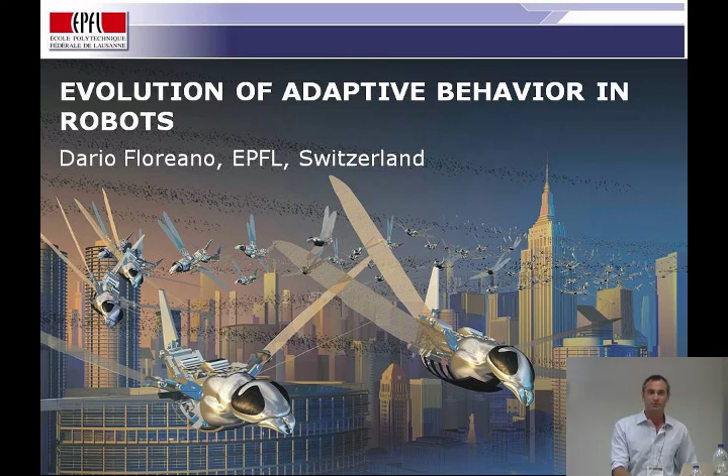Instead of focusing on one, two, or three specific examples of robots that may have evolved some sort of relatively complex cognitive functions, I decided to show you many cases of robots that we have been evolving in the lab. Some of these cases are more sophisticated than others.

It's a little bit up to you to see what we can do with this approach, how far we can go, and whether some of these robots may start to manifest some of the ingredients that we need, or that we think are necessary, for the evolution of consciousness.

My stand on this problem is that nothing makes sense except in the light of evolution, as it has already been said in the past.

My laboratory is very active in many aspects of robotics, including utilitarian aspects of robotics. So this is an artistic view of what we want to do. We focus quite a lot on biomimetic approaches, and we develop a lot of flying robots.

Although you will see very few flying robots in my presentation on evolutionary robotics today, because for technical reasons it's difficult to evolve them. I'm also interested in the evolutionary approach to the design of robots and control systems.

Inman Harvey made an excellent job this morning explaining the basic evolutionary cycle that we use in evolutionary robotics, and I want to repeat that.

I want to show you, however, an example of how you can apply that evolutionary loop to a very simple robot.

Imagine that you have a robot, a circular robot, and you want to evolve the capability of doing collision-free navigation. You start with a generation of random genomes corresponding to different control systems, and one of the main ingredients is that all the robots in the initial population have diverse genotypes and diverse behaviors.

So you see here two robots of the first generation. The first one was rotating on the spot. The second one rotates on the spot, then goes towards an obstacle.

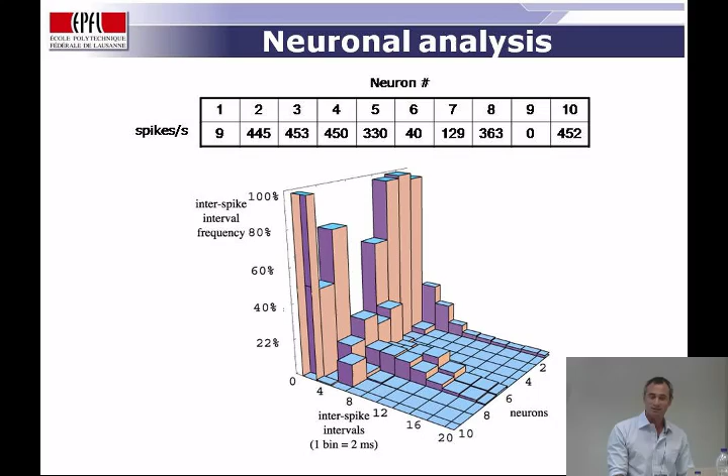So then we looked at the interspike variability, whether the spiking was periodic or spread across multiple time intervals. We saw that some neurons had a very diversified spiking rate, whereas others were spiking at very periodic intervals. We thought, if we lesion the neurons that spike with very high variability, the robot probably won't be able to perform the task anymore. But that was not true — the high variability or diversity in spiking rate was not what was really counting in this robot.

We found that we could kill or lesion 30% of the neurons in this brain and leave the robot with intact behavioral capabilities, if we killed only the neurons that were spiking in a way not correlated with the spiking activities of the postsynaptic neurons. There are a few neurons out here, actually 3 neurons, 1, 5, and 7, whose spiking activity is never correlated with the spiking activity of the neurons they connect to. If you lesion those neurons, independent of their activity, you get a robot that, despite having 30% less neuronal mass than the original evolved robot, is still capable of moving around.

The only difference is that the behavior of this robot is a little less smooth. Of course, if you take 30% of your brain's dynamics out, you depend much more on the sensory experience you get, so this robot is much more reactive to whatever it perceives, but it can still move around. So it seems that the correlation of spiking activities in evolved spiking neurons plays a very important role, at least in this case.

We then asked, can we evolve, using the same fitness function and the same spiking neuronal network, a control system for a robot with more complex dynamics than one standing on wheels? To test this, we took a blimp, a small Zeppelin, and equipped it with cameras in the front, the same type of camera, but with changed lenses so the field of view was much larger—150 degrees instead of 36—which you may need if you have a large body and very complex dynamics, since you want to see quite a lot around yourself.

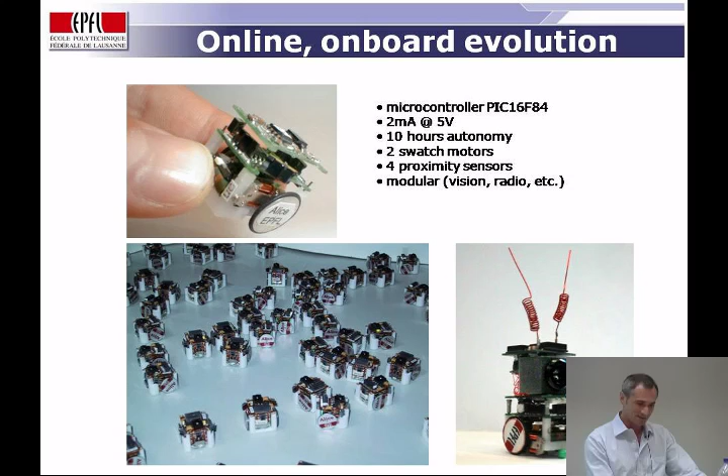You can also shrink the whole approach and use it for much smaller robots, but I will skip this—it's just the same thing. So we do also artificial evolution on sugar cube-sized robots. Everything runs on board, but I'll skip this, and I will move on to a different example.

Active vision. So far, the visual system of the robot was solidal with the body of the robot. But many animals are capable of looking around and deciding what they look at. So we may decide that we look at that direction before actually moving in that direction. So we can do active exploration of our environment, and this is a quite powerful sensory motor capability that we have.

So what we decided to do was to investigate the role of active vision using an evolutionary approach again. We took a mobile wheeled robot, here it's slightly larger than the previous one. We equipped it with a Sony pan-tilt camera, so the camera can do a pan and a tilt, and they can also zoom in and out.

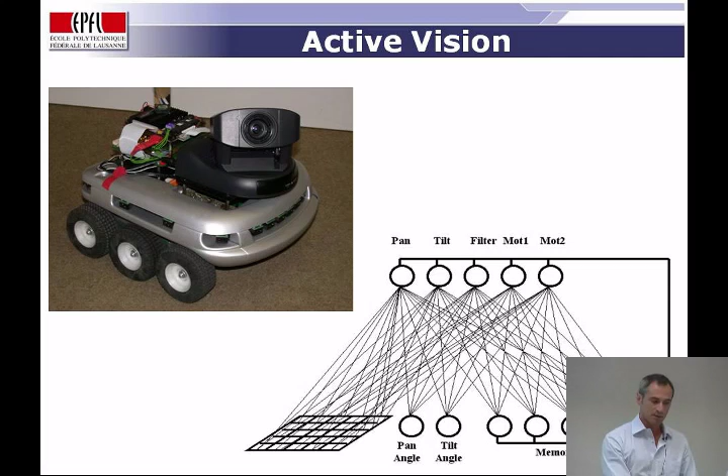We had a simple neuronal system that received input from a set of neurons whose receptive fields were spanning the entire field, or a portion of the field of view of the camera. We had proprioceptive sensors, just like any animal has, about the position of the eyes in the head and about the position of the head in the body. These proprioceptive sensors were telling the robot's neuronal network the pan and tilt angle of the camera.

And then we had some memory units, so neurons that encode the internal dynamics of the robot. The output units of this evolved neuronal network were not only controlling the wheels of the robot, but also controlling the pan, the tilt, and the zoom in and zoom out of the camera. So the robot could at the same time move and decide where to look at, which would affect the sensory input that the robot receives.

Now, if we put the robot in an environment like this, in an office, and then we use the same fitness function we have used so far for all the robots I've shown, you see that the robot can maximize the fitness by moving around this environment. So the fitness is maximized if it can manage to move forward the body, by counting the rotation of the two wheels.

But you can see that the robot can look at many different things here with the camera in the office. It can look at many different things, like people passing by, like the window, like this. But in fact, the robot can only move within this very small confined space. So the question is, what will the robot look at?

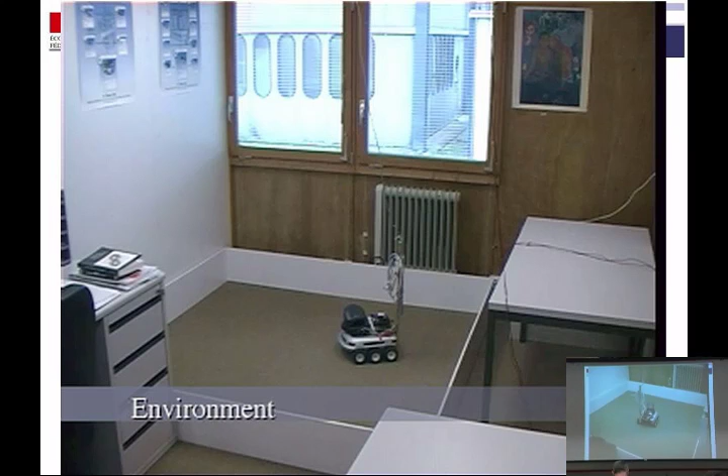So we started evolution, and as you're going to see in the video, some of the individuals in the initial generation pay attention to things that are not relevant for the task. So this robot is paying attention to the sun coming through the window. This is interesting, but it doesn't help the robot move around, avoiding the walls. So this robot will make very few offspring for the next generation.

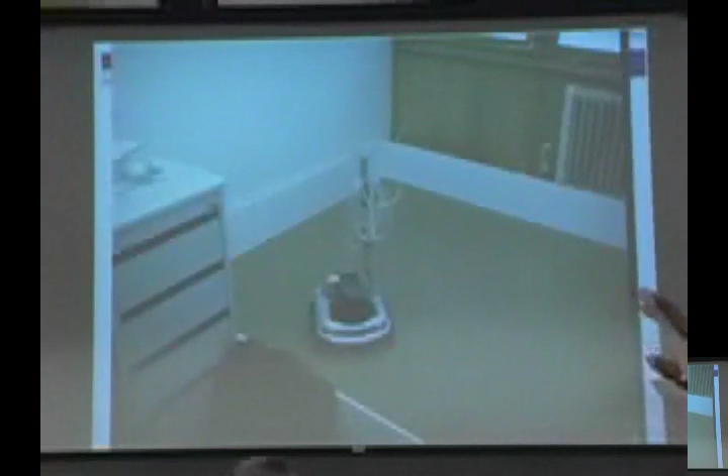Then you have a robot here that always looks up, and here I'm filming the robot with the camera, and the camera is on a black pole, like that one. As soon as the robot can see this black stick, this black feature, it will stop and look at the camera. But this is not good enough for moving around.

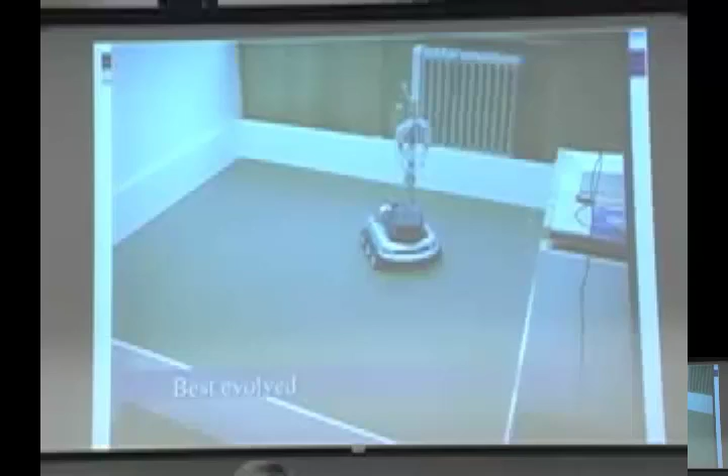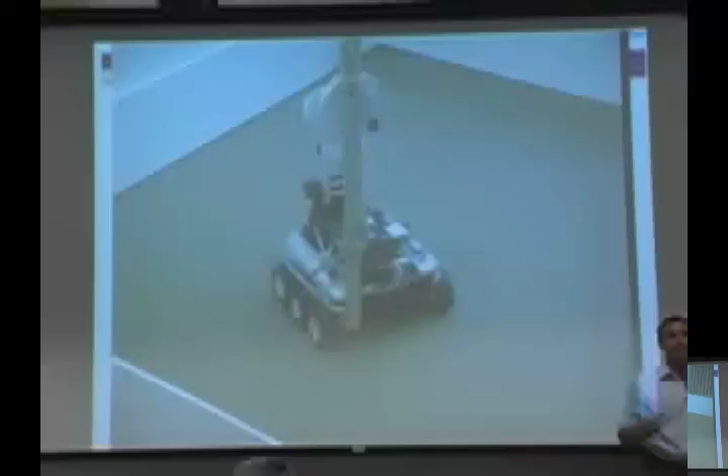And then you see that after a few generations, the best evolved robots look at the edge between the white wall and the floor, and they always keep track of this edge. They also sometimes look ahead, because this is the most informative piece of information you have in this environment to know how far you are from the wall and to move ahead.

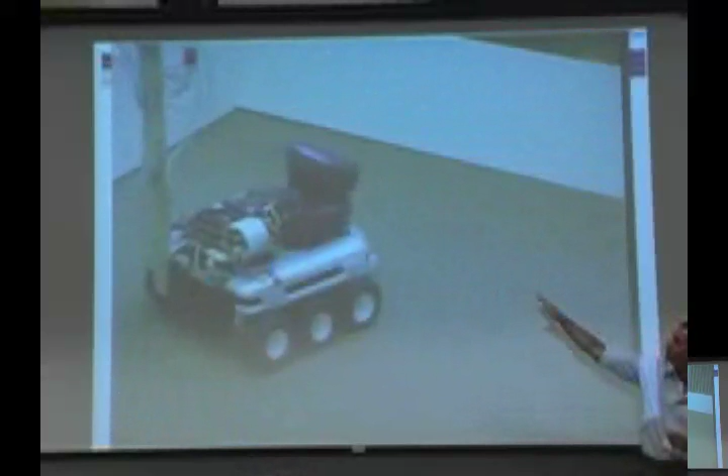And sometimes they also turn the camera. When they turn to the right, they move the camera to the right to see if there is any obstacle, then they focus back again on the edge. So it's a quite interesting sensory motor coordination here, which is effective.

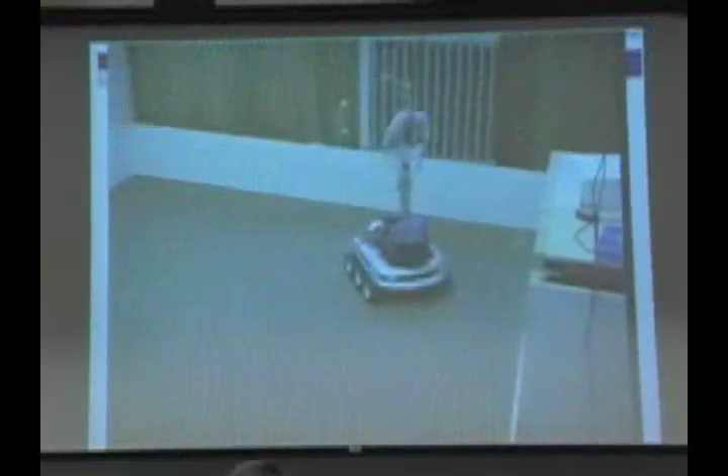And we also did experiments outdoor in a number of different environments. We can now start to change the body of the robot and go for more complex robots like humanoids.

Here again, with humanoids, in this case we were working with the Fujitsu robot, and the robot has a pan tilt camera. One of the interesting things about leg locomotion is that as you move, the entire environment moves very dynamically. So either you keep your head or your gaze fixed on some object, or everything will move around. The question is, how can a neuronal system cope with this very dynamic behavior?

Evolving a control system for a humanoid robot is not possible in reality, because you would break the mechanics very easily. Evolution operates by repetitive tests of multiple individuals. So if you operate with wheeled robots, it's okay, you can run evolution for multiple days, but not with a humanoid robot.

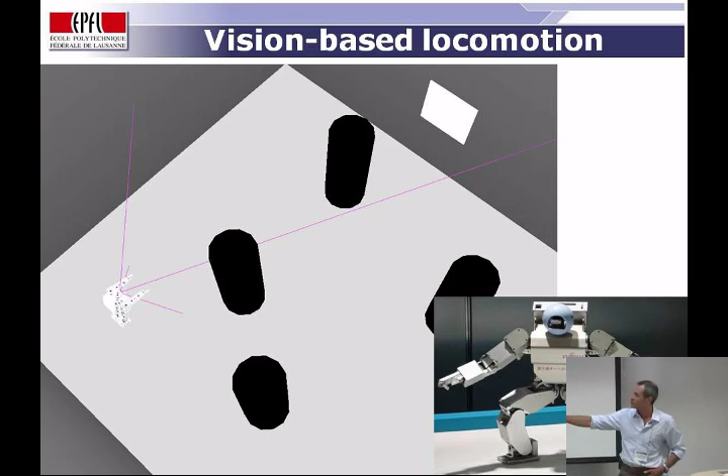So what we did is we used a simulator provided by a company for this, and we evolved in the simulation a control system for this robot that can only see through this camera. The robot is put in this simulated environment.

There are a few pillars or columns in the environment, and the task of the robot is to reach that window over there, where there is an opening. So the robot has to learn how to avoid the pillars, locate the window, and walk towards the window with this very dynamic field of view. The output is controlling the movement of the legs and controlling the pan, the tilt, and the zoom in and zoom out, which is like the focus of attention, if you like.

I'll show you this video. What you see here is the robot's perspective, where the robot looks. This is the movement of the robot from the top, and this is what the robot looks at.

For quite a long time, the robot moves on the spot because it has to locate where the window is; it cannot find it. As soon as it locates it, you see it starts moving towards the window. Now it lost the window. Now it will get a better perspective, I think. So the window now is larger, and it will start moving towards the window. Then eventually it will reach the window. So you see it gets confidence and it reaches the window very easily there.

So this is just to show you that artificial evolution, when put in the right conditions, in the right environment, with a suitable type of morphology, will develop more complex strategies. You can also have fun with this.

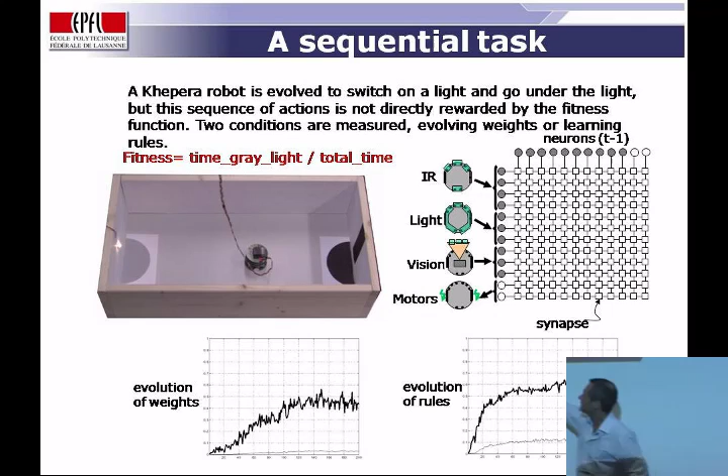Okay, now let's look at one of the most difficult problems that I've given robots so far using the evolutionary approach. And this is a sequential task. What we do is that we put the robot in this arena. The robot has a vision system, has the same linear camera we've seen before, and its lifetime is 2 or 5 minutes. I don't remember how much every robot was tested, 2 or 5 minutes.

And it can gain fitness points only if it is sitting under this light bulb, where the gray area is, when the light bulb is on. Now, the problem is, as the robot starts its lifetime, the light bulb is off. So if the robot goes to this gray area when the light bulb is off, there is no fitness point to be gained.

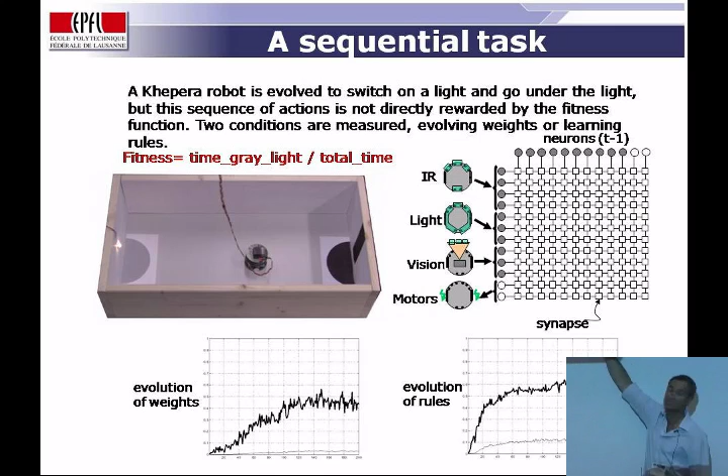The only way to switch the light bulb on is for the robot to go here towards this light switch. We can detect that the robot is on the light switch if it is sitting on this area. And then when the robot hits the light switch, the light bulb will go on, and the robot has to rush here and stay under the light bulb. So we do not program anything. We just evolve a neural network. And we evolve the neural network in two conditions.

One, where the genetic string encodes only for the synaptic strength, and the robot cannot learn during the lifetime. And two, when the robot uses the same genetic string to encode the synaptic learning rules, so the robot can learn during lifetime. And we want to see, first, will evolution come up with a behavior or a strategy that is capable of solving this problem, so learning that the robot has to go to the light switch before it can go to the light bulb.

And second, is there a difference in whether evolution can manipulate the capability of learning during lifetime? We use fully connected neural networks. And first of all, if you simply look at the fitness or the performance of the evolved robots in the two conditions over generations, you see no difference. So these are generations on the x-axis, and on the y-axis is the fitness of the evolved robot. When we evolve the weights and the robot does not learn, or where we evolve the learning rules but not the initial weights, you see that more or less the fitness is the same.

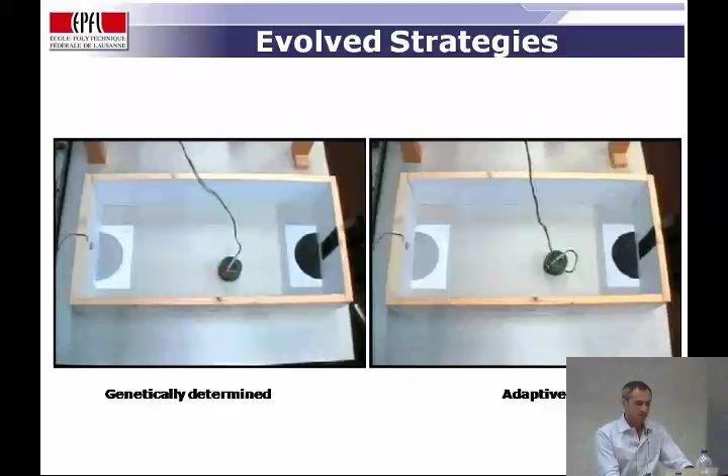If we take the best evolved robot in the case when you evolve the weights but the robot cannot learn, you see that what the robot does is sort of stereotypical behaviors. It basically performs loops in the environment. It avoids the walls. We know that evolution can come up with collision-free navigation. And eventually, by using this minimalistic strategy, it will end up on the light switch. The light will go on, and then the robot displays a looping trajectory that is oriented towards the light bulb, and it will stay there. It's a very simple and efficient way to solve the problem, which many insects may use.

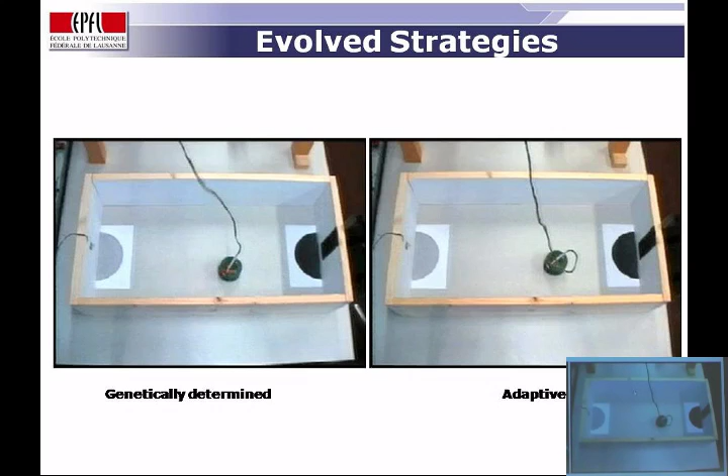Now, the situation is very different when the robot cannot encode in its own weights the geometry of the environment and cannot encode the reaction to the environment. It has to learn, if you like, on the spot how to solve the problem. And it learns it very differently. So this robot starts with random synapses, so at the beginning its behavior is still quite primitive, and then very quickly, as it is exposed to the light switch, it becomes attracted to the light switch, and then, as it moves, it becomes attracted to the light, and it will go very straight towards the light.

Now, how can we test whether this behavior is really different from the one on the left? Well, we can change the environment and see how the two robots perform. And as I said, one way of changing the environment for these robots is to change the color of the walls. Now, if we change the color of the walls of the robot that has been evolved without a learning capability, this is the evolutionary environment that the robot has seen for many generations. Here the robot is capable of doing its minimalistic behavior and going towards the light bulb.

We change the color of the walls. You see the robot hits the wall and is not capable of moving away from it. Again, here we change the color again. The robot is not capable of adapting to the new colors of the walls. So it hits the walls; if you like, the sensory motor coordination is broken. It cannot adapt to it anymore. We take the robot that is capable of learning during lifetime, and you see that no matter what the color of the walls is, it will still display the same sort of strategy.

We can also do a much more complex and tricky thing: we can change the layout of the environment. So this is the environment that the robot has been experiencing during evolution. The light switch is here, the light bulb is here. These are two fundamental landmarks for its performance. Now what we do is that we put the light switch here and the light bulb here. And you see that the genetically determined individual is revealed. It does these minimalistic looping behaviors, and it will never end up on the light bulb. Instead, our adaptive individual will avoid the walls, locate the light switch, and then go towards the light bulb.

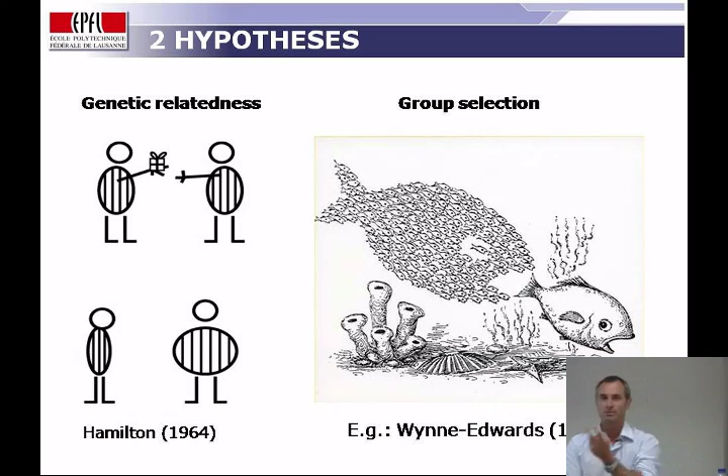Now, when we are talking of the problem in evolutionary terms, it means that the cost is that you have a lower probability of transmitting your genes to the next generations. And the evolution of altruistic behavior is a problem for Darwinian theory, or at least the vanilla type of Darwinian theory, because the vanilla interpretation of evolution is that individuals should always maximize the probability of transmitting their own genes to the next generation. Now, there are two hypotheses that biologists came up with that could explain the evolution of altruistic behavior, where an individual is ready to sacrifice its own reproduction for the community.

One is the theory of genetic relatedness, put forward by Bill Hamilton in 1964. The theory says that the more genetically related you are to your team members, the more likely you are to display altruistic behavior, because although you decrease your probability of transmitting your own genes to the next generations, by your altruistic behavior you increase the fitness of your team member, who is very likely to carry the same genes as you have, and therefore you can indirectly transmit your genes to the next generation by favoring your kin.

There is another theory instead, the theory of group selection, that says, look, it's not necessary to be genetically related to evolve altruistic behavior. All you need is to be able to work together with diverse individuals in a team, to be very complementary, and if as a team together you can perform a task much better than another competing team, then as a whole, all the team members will have higher probability of surviving, getting access to food, and transmitting their own genes to the next generation.

Now, these two theories have had highs and lows over history, but there is no fossil record in evolution, and it's very difficult to do evolution of biological organisms because it takes a long time, especially if they are so sophisticated to live in colonies. And so what we decided to do is to test the two theories. We came up with two ways of designing the evolutionary approach so that we have either homogeneous, genetically related teams of robots, or genetically unrelated or heterogeneous teams of robots.

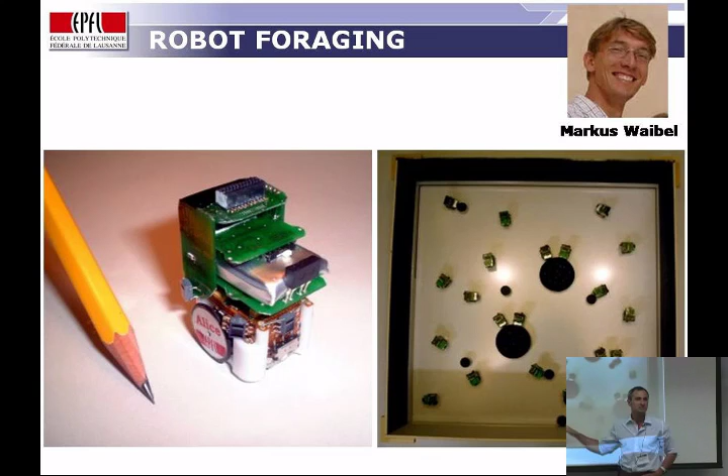And if the robots manage to take the food here, with an external camera we can detect whether this has happened, and we can tell that the corresponding robot has gained fitness points or energy, which is good for reproduction. Now, a small food token can be taken to the nest, this white wall, only by a single robot. And the robot can feed on it, and it will consume the entire energy of the food token.

Now, you also have big food tokens. The big food tokens contain enough energy for the entire colony. So if a big food token is taken towards the nest, every robot in the colony will get enough energy, just like ants, they can take a big prey towards the nest, and everybody can feed on it. However, in order to push the big food token towards the nest, it takes at least 2 or 3 robots because they are very heavy.

Now, there is a cost to pay. You can either be selfish here and say, I take the small food token, I eat my own food, I don't care about the others. Or you can be unselfish, and decide to go towards the big food token and hope that somebody else comes along and helps you. And the cost to pay here is that, as you are going to see in the video in a moment, pushing a big food token towards the nest takes a lot of time, and the robots have a limited lifetime. Two, it's not guaranteed to succeed because of physical interferences. And three, if the other robots do not help, you spend your entire life waiting for somebody else to help, and you will never get fitness points.

So the question is, under what evolutionary conditions will robots display altruistic cooperation and go for foraging of big food tokens rather than small food tokens? And the answer is that, of course, if you have group selection or genetic relatedness, you will get evolution of altruistic cooperation.

...evolution of altruistic cooperation. I want to show you here the evolution of altruistic cooperation in the case of genetically related individuals. At the beginning, at generation 0, the robots do not even know how to move around. Here you see the nest, the white wall, and you see that the robots first don't even know how to coordinate their sensory perception with the motion. Sometimes they simply hit the wall, and sometimes they have catatonic behavior like this. They don't move at all.

Now, if you wait long enough, you will see that after some time, the robots display a coherent behavior, and they will forage for the food tokens. You will see that robots start to go for the big food tokens. They cannot move it alone. You get a few robots that are selfish, and every population can withstand a certain amount of selfish individuals. But most of the robots will go and help other robots to push the object.

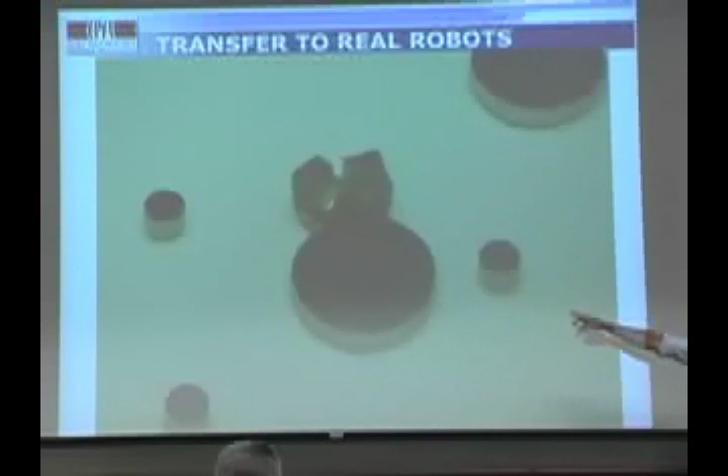You see, this is a robot that encounters a small food token, but decides to avoid it to go and help these other robots that push the big food token. So you see, pushing a big obstacle like this, a big food token, is not easy. There is a lot of physical interference, and this is why there is a cost to pay. So if you are genetically related, you can evolve this sort of behavior.

And then we tested this sort of condition to see whether we could also explain the evolution of altruistic communication. The evolution of communication is a big mystery, and there is no fossil record for communication. In particular, it's very difficult to explain why individuals would communicate or give away information that is very precious for their own survival to other individuals.

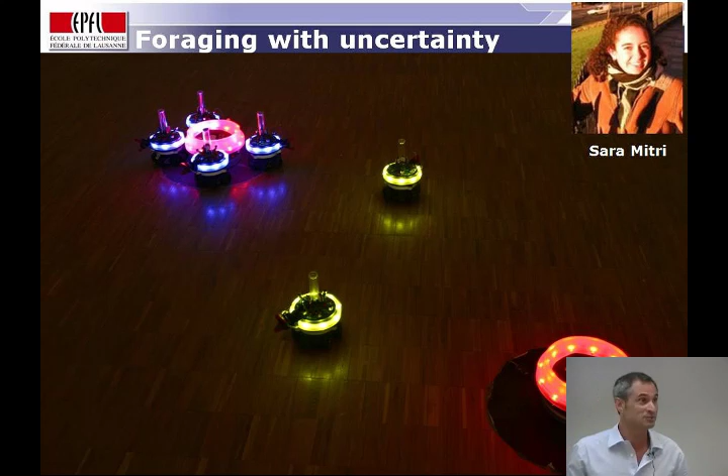And the robots have two choices. They can either communicate where the food or the poison is, or they can stay silent and decide to discover for themselves where the food and the poison is. Whenever you evolve these robots under conditions of genetic relatedness, you see that the robots will start to use their colors to communicate where the food and the poison is.

You see, this robot, this is the best evolved colony. This robot goes here, and then it turns blue. And the other robots have evolved a neuronal network that understands that blue means, hey, come here, here is the food. You see that they will start moving here towards the blue. The more blue there is, of course, the more they are attracted.

And as you're going to see now, the cost in doing this is that the more robots cluster around the food, the less space there is for other robots to go there. So if you communicate where the food is, then you will get a lot of robots there, and eventually they will not get enough food.

So you see a robot going here. It cannot touch the disk, so it cannot get a fitness point. It tries to go there, but it cannot. But eventually, hey guys, here is food, come here anyway. And then you got that individual there looking lost, but eventually it will go towards the food.

So this is so powerful that you can actually evolve even very primitive forms of communication. And I have many other examples with flying robots, but I think I better stop here. Thank you very much for your attention.